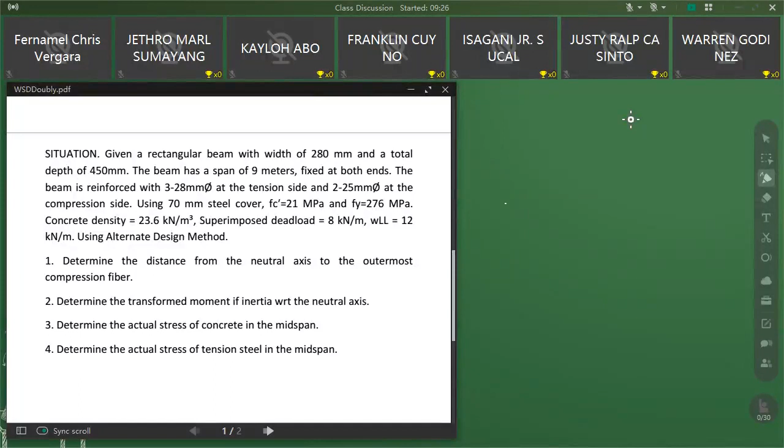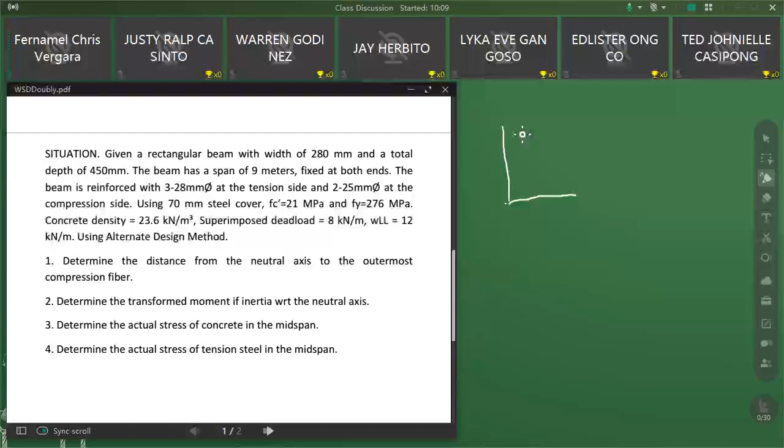So let's continue our discussion from last meeting, which is the working stress design method, one method of designing reinforced concrete. What we discussed last meeting was singly reinforced beams, meaning the tension rebars are only on the tension side.

If this is our neutral axis, and this is the compression side and this is the tension side, we only place steel bars on the tension side. This is what we call a singly reinforced beam. So why did I say the compression side is on top and the tension side is below the neutral axis?

Because if you have a simply supported beam and we load it, say with a uniform load, which is typical in structural design, let's call it W in kilonewtons per meter. If this is the shape of the load and this is your beam, the effect of the load on the beam, when it bends, will cause the beam to bend downward.

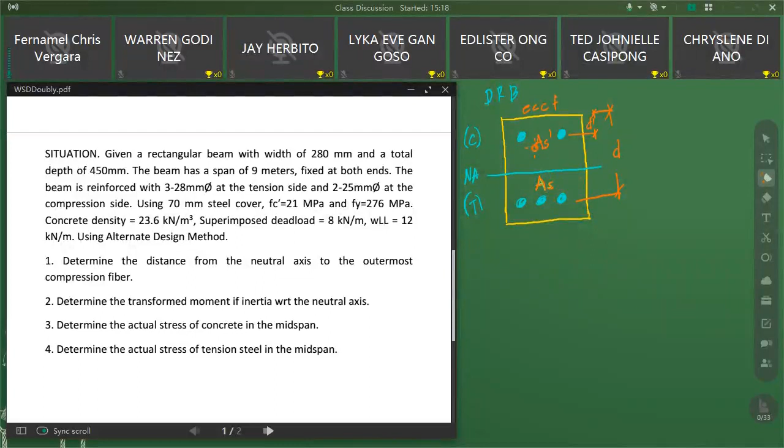The area on the tension side is As, the area on the compression side is As prime - that's the only difference. So when you analyze using WSD, the procedure is still the same. First, you draw the gross section of the beam. Next, you crack the beam at its center.

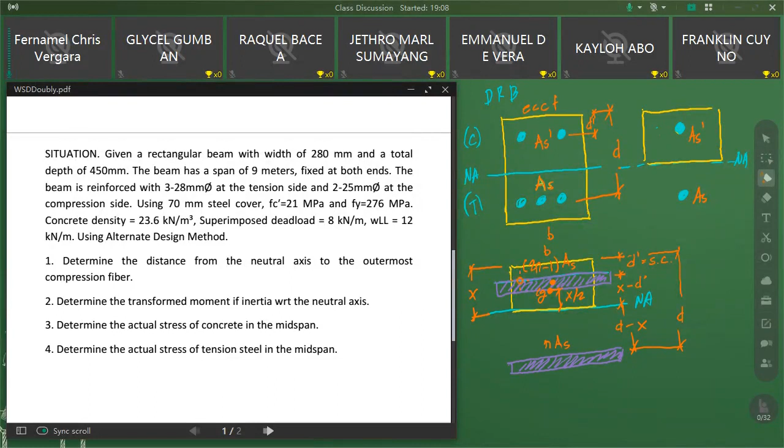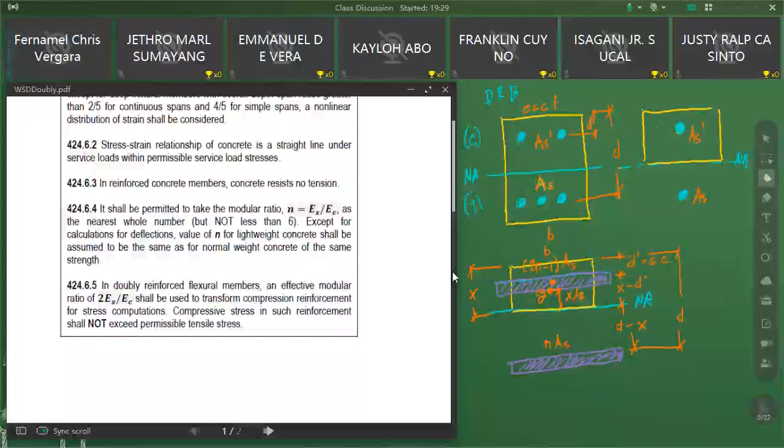It shall be permitted to take the modular ratio N equal to ES over EC as the nearest whole number but not less than 6.

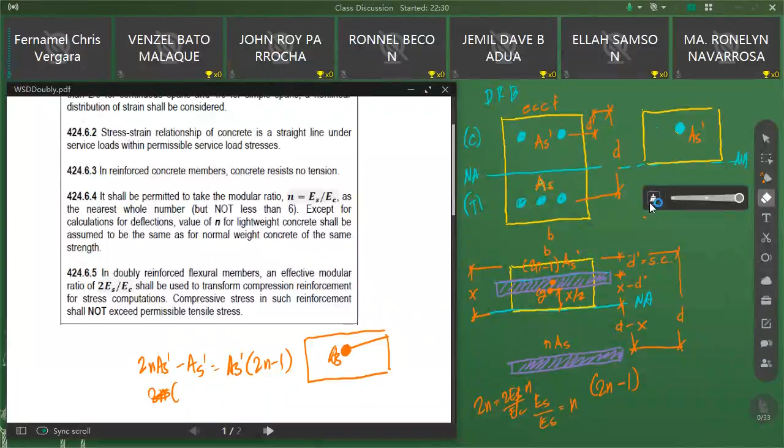So let's proceed to our example. You have here the situation.

Given a rectangular beam with width of 280 mm and total depth of 450 mm, the beam has a span of 9 meters, fixed at both ends, meaning this is a fixed-ended beam with a length of 9 meters. The beam is reinforced with 3-28 mm diameter bars at the tension side and 2-25 mm at the compression side. Using 70 mm as the steel covering, Fc equals 21 MPa and Fy equals 276 MPa.

The concrete density, or unit weight of concrete, is given as 23.6. This is based on the concrete density found in section 204 of the NSCP, Table 204-1, for dead loads in kilonewton per cubic meter.

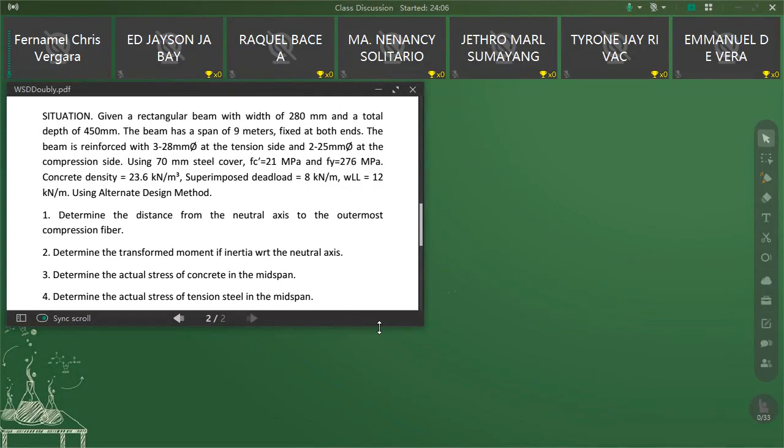The superimposed dead load is equal to 8 kilonewton per meter, and the live load, WLL, equals 12 kilonewton per meter.

Using the alternate design method, determine the following: first, the distance from the neutral axis to the outermost compression fiber, which is x. Second, the transformed moment of inertia, ICR. Third, the actual stress of concrete, Fc, and the actual stress of steel, Fs, at midspan. So those are the questions here.

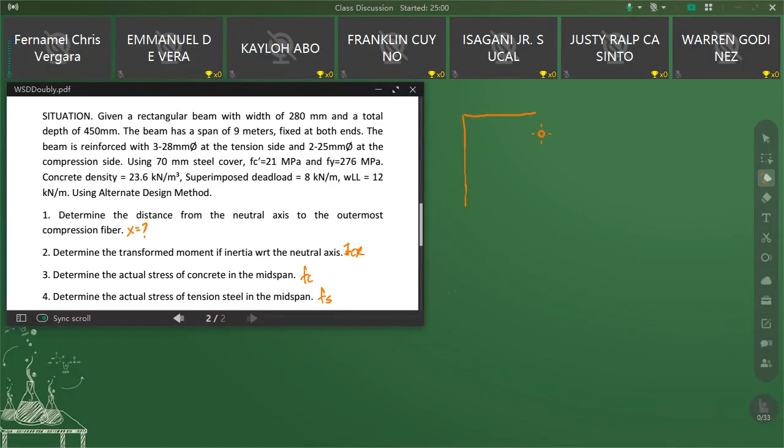So first, let's draw the section, since that's what we should do first. We have a dimension of the beam equal to 280 by 450. The total depth is 450.

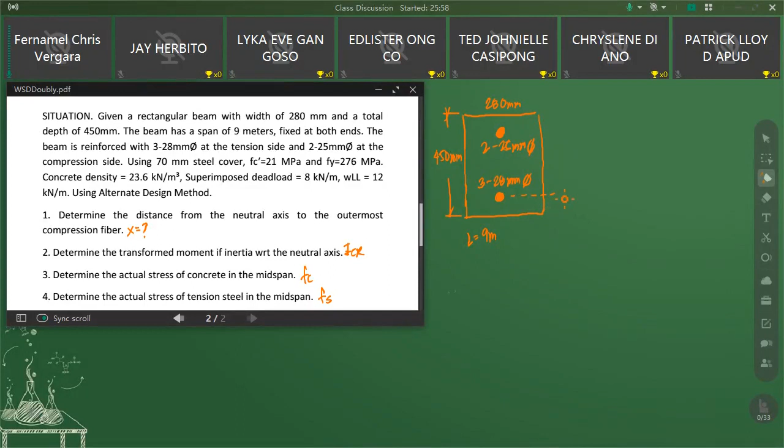The steel covering is the distance from the centroid of the rebar to the adjacent fiber. This is 70 mm, the same for both the tension side and the compression side — the distance from the centroid of the rebar to the adjacent fiber.

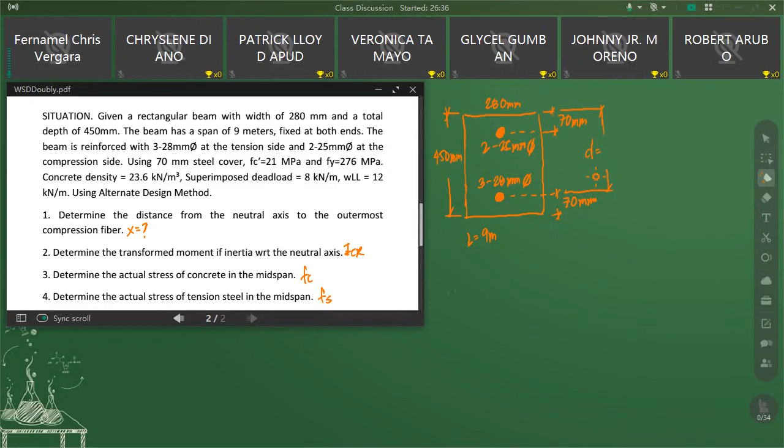So the effective depth, d, can also be solved — it is the distance from the tension rebars to the outermost or extreme compression fiber. If you look at this, d is equal to 450 minus 70 mm, giving you a value of 380 mm.

This is the effective depth. Okay, so we now have all the parameters we need to solve numbers 1 and 2. Let's focus on number 1 and number 2 first. Next, you sketch the section.

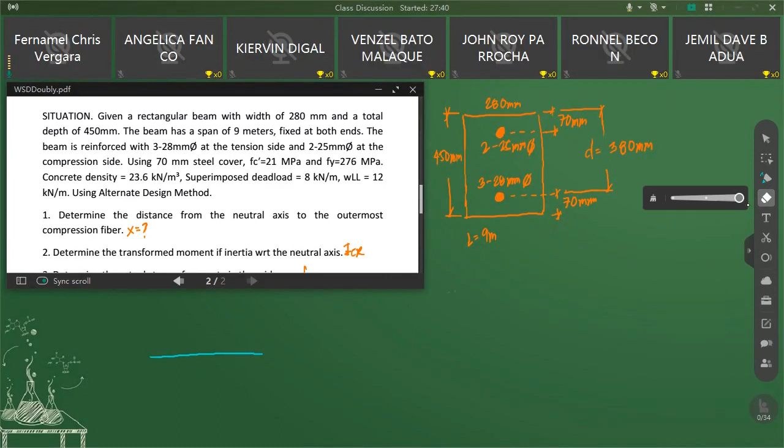You assume a horizontal line near the center of the beam, which will represent the neutral axis. Let's sketch this out. Okay, so here we have the neutral axis.

This is the concrete above the neutral axis, which will be the concrete that resists the compressive stress. This part is 280 mm, this is the base, and the height of our beam section now will be x.

Now for the steel, this is As prime — let's place As prime first. And down here we have As. The distance from the centroid of As to the neutral axis is d minus x.

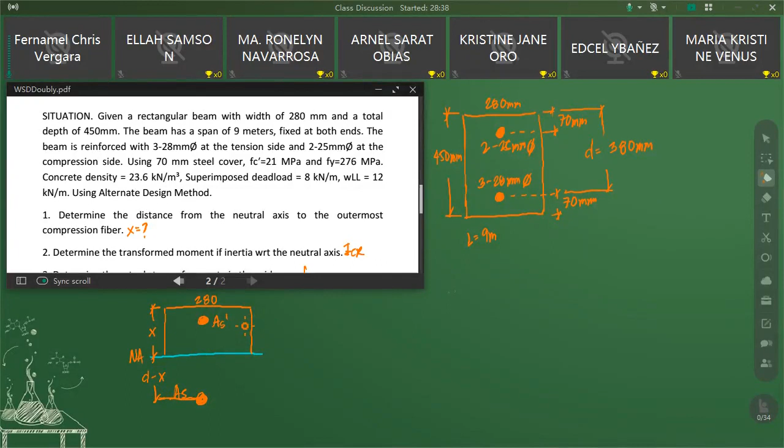We also get the distance of As prime to the neutral axis. If this is 70 mm — which, as I mentioned earlier, is d prime, or the steel covering on the compression side — then the distance of As prime to the neutral axis is x minus d prime, or x minus 70. So that's its distance.

After that, you convert or transform the section into a homogeneous section. This means our steel needs to be transformed, or transposed, into concrete — all the steel we have.

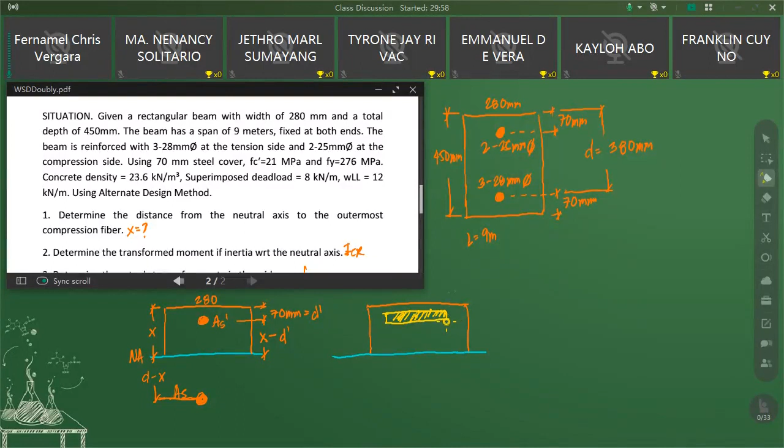So, let's place the distances. You have the effective depth, 380 minus x, and this is x. And here, going to this point, is x minus 70, or x minus d prime. The centroid of the rectangle, going to the neutral axis, is x over 2.

So once you convert the steel, you add a multiplier. You have n times As here, and here, 2n minus 1 times As prime.

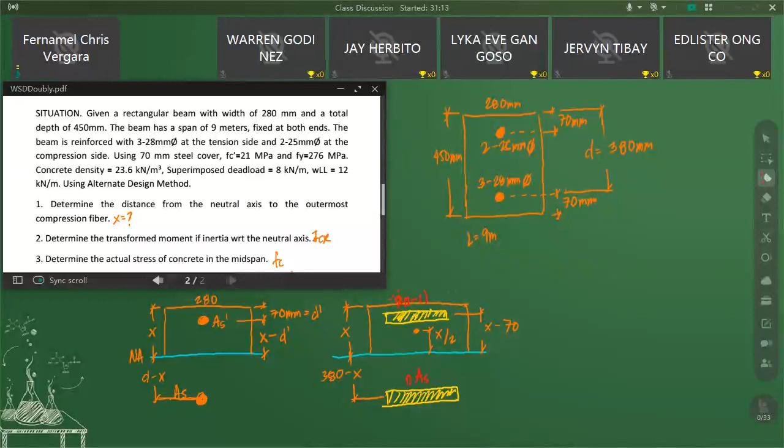AS prime. So alam naman natin na 280 mm, no? 280 mm yung base nito.

So since na-transform na natin yung section, susunod nating gagawin dito is i-equate natin yung first moment of area above the neutral axis sa first moment of area below the neutral axis.

So yung formula natin nito, alam nyo naman, this is equal to area times y bar. Napakadali lang yan, dapat alam lang natin yung formula for area at yung y bar. So above the neutral axis, no?

The area above the neutral axis, dalawa yung magiging area natin: yung rectangular block or yung rectangular concrete na may base na 280 times x. So you have the base times the height of the concrete times the y bar of the concrete block, that is x over 2, plus...

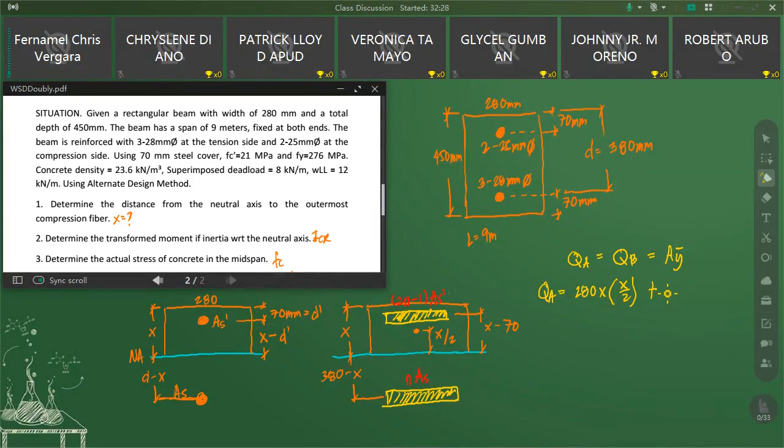Ano pang nasa taas ng neutral axis natin? Yung ating steel, no? Yung compressive steel. Yung area niyan is equal to 2n minus 1 times AS prime, and yung distance niya papunta sa neutral axis is x minus 70. Ayan, so this is your Q above.

The first moment of area above. Substitute na lang natin yung mga values, or kunin muna natin yung N at saka yung AS prime, no?

Mas magandang kunin muna natin yan. Yung N natin dito, you have the formula ES over EC. So you have the elasticity of steel equal to 200,000 over the elasticity of concrete, which is equal to 4,700 square root of FC prime.

Your FC prime is 21. So your N here, diretsuhin ko na lang to, I think this will be equal to 9 point something. But sabi sa code natin, the value of the modular ratio will be round off to the nearest whole number. So magiging 9 lang, okay?

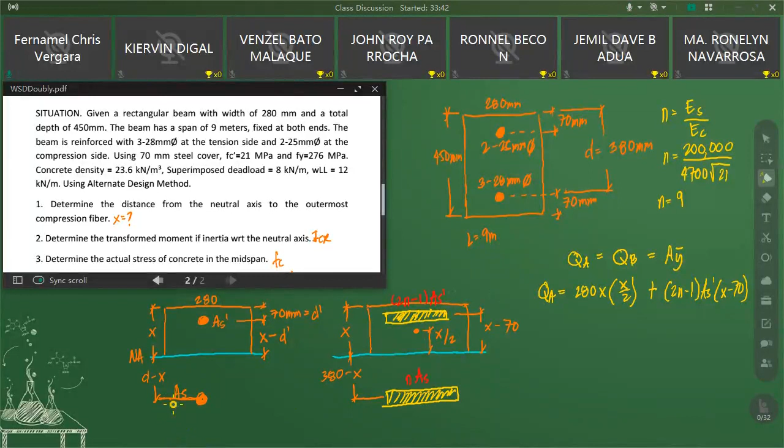So yung AS prime naman natin dito, try lang muna natin i-solve. Palitin ko lang muna to. Yung AS prime natin is equal to N times number of bars, no? Dalawang 25 mm yan, diameter. So you have 2 bars, 25 mm diameter, times area of 1 bar.

You have pi over 4 times 25 squared. So you can cancel this, you have AS in terms of pi lang natin. So this is 2 and 4, no? Magiging 1/2, pi over 2 times 25 squared. So you have 312.5 pi. Magiging sagot dito.

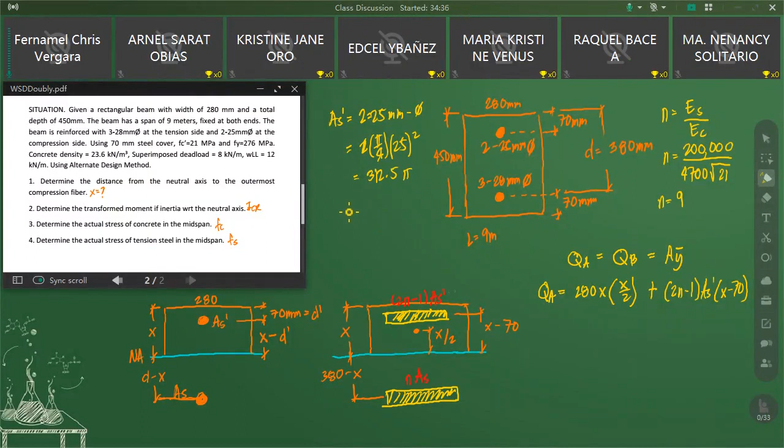Now for AS naman, you have 3 bars, 28 mm diameter. So this is equal to 3 times pi over 4 times 28 squared. Ayan, so dito try natin i-solve in terms of pi pa rin para maging exact lang yung ating sagot, no? So you have 588 pi. Okay, so in terms of pi lang natin para maging exact talaga yung values natin dito.

Okay, so this is for AS and AS prime. So dito, substitute na natin sa Q above.

So we have 280 x squared over 2 plus 2 times n, which is 9, minus 1, times AS prime, you have 312.5 pi times x minus 70. So this is your Q above.

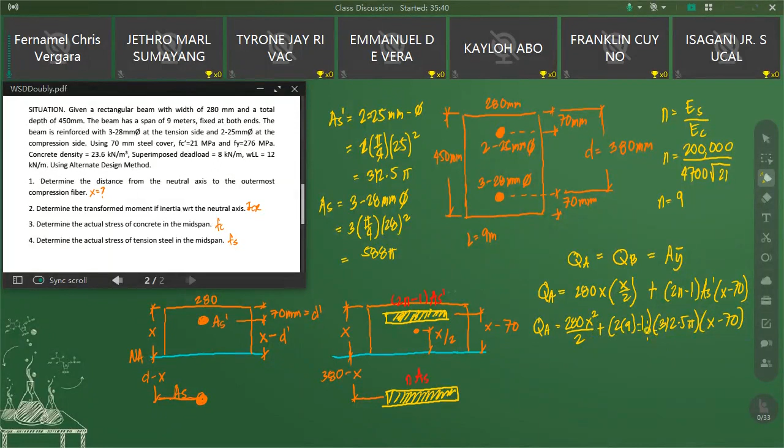Your Q below naman is equal to area below the neutral axis times the y bar below the neutral axis. So the area below the neutral axis, that is NAS. Yung steel, yung tension steel na na-convert kay concrete, may area siyang NAS. And yung distance niya from its centroid to the neutral axis, it is equal to 380 minus x, or d minus x. So ito yung ating Q below.

So substituting the values for Q below, you have N equal to 9, AS equal to 588 pi, times 380 minus x. So ito na yung ating magiging... ay, Q below, no? Q below.

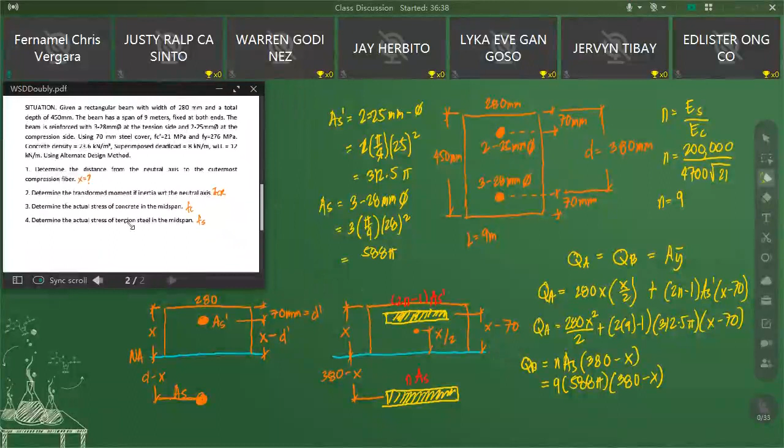So pwede na siguro natin i-equate ito, itong Q above and Q below, para makuha na natin yung ating value for x.

So Q above is equal to 280 x squared over 2 plus you have 18, that is 2 times 9, minus 1, times 312.5 pi times x minus 70. This is your Q above, equating it to the Q below, the first moment of area below the neutral axis. You have 9 times 588 pi times 380 minus x.

So you get the value of x. You should solve for the value of x. What did you get? So may isang nakakuha na ng sagot agad.

141.071. Paano naman yung iba, wala bang ibang sagot? Wala, so i-adapt ko na lang yung sagot ni Casinto, na 141.071, which is yan yung tamang sagot.

141.071, this is in mm. Naka-mm yan. Lagyan niyo ng unit yung mga values niyo para malaman natin kung tama o hindi yan, kailangan may unit kayo sa final answer niyo. So this is the answer for number 1.

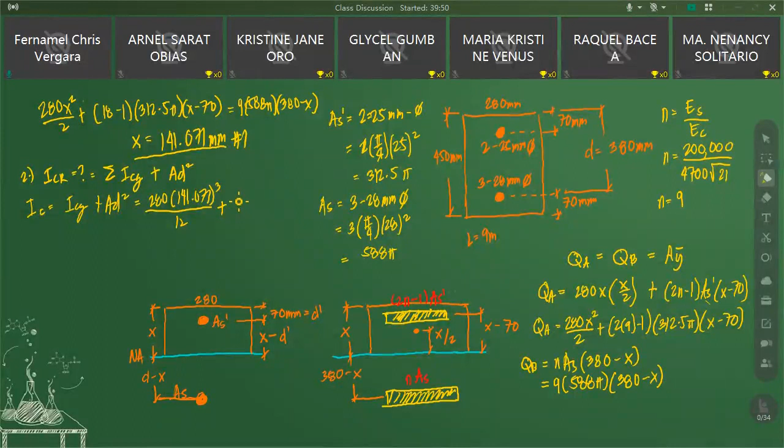The area is equal to base times height lang, 280 times the height of the concrete which is x, 141.071, times d squared. Yung d, it is the distance from the centroid of the section to the point kung saan mo gustong kunin yung inertia.

Ito yung section natin, itong concrete, and this is its centroid. Nandito yung centroid niya. The distance from its centroid papunta sa neutral axis, kasi doon natin gusto kunin yung inertia, is equal to x over 2. So therefore this will be 141.071 over 2, naka-squared yan. Okay, ilan yung magiging IC natin?

Or, the inertia of concrete with respect to the neutral axis. This is only for the concrete, para lang yan sa concrete.

So you have 280 times 141.071 cube over 12, plus 280 times 141.071, times 141.071 over 2, square niyo, naka-square dapat yung D. So you have 262,029,393.3 na natin. Yes, thank you Herbito and Casipong.

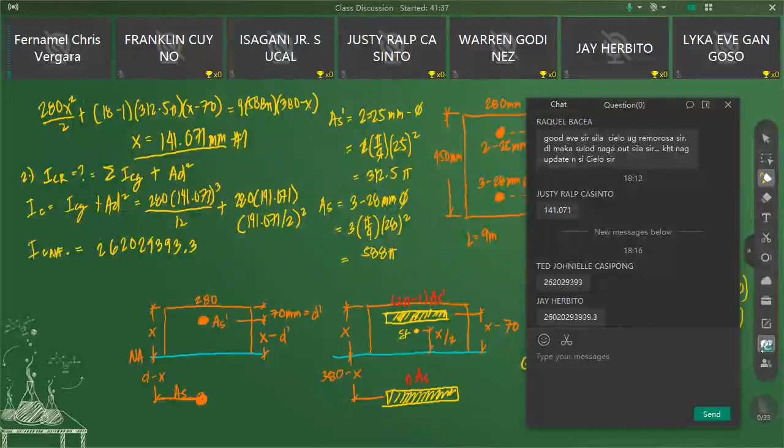Pareho naman kayo ng sagot, 262,029,393.3. This is in mm raised to 4.

So this is the inertia of the concrete with respect to the neutral axis. This is not yet the answer, kasi kailangan nating makuha yung inertia ng steel na nandito, present sa ating section. Para pa lang yan sa concrete.

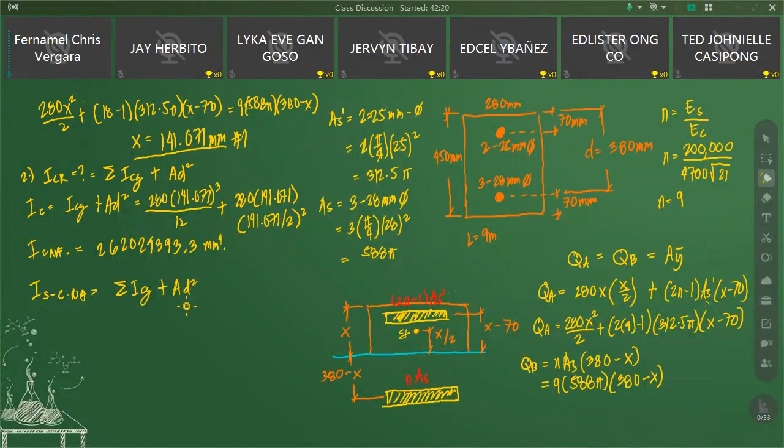Yung steel naman na na-convert kay concrete, kukunin natin yung inertia niya with respect to the neutral axis. Meron tayong dalawang steel dito. Sabi ko nga, kapag steel na na-convert kay concrete, at with respect to this design method na WSD, our ICG or the centroidal inertia will be equal to 0.

Therefore, ang magiging formula na lang dito is summation of AD squared, above and below. Below the neutral axis muna tayo, we have the area NAS times D squared. The distance from the centroid of this area papunta sa neutral axis is D minus X, or 380 minus X.

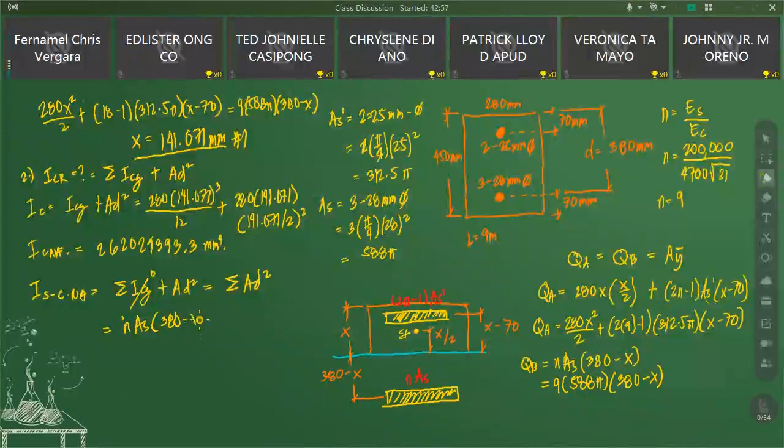Naka-square yan. This is the neutral axis. Plus yung AD squared above the neutral axis, yung area diyan sa taas ng neutral axis is equal to 2N minus 1 times AS prime.

This is the area ng steel na converted into concrete above the neutral axis. Then you multiply it by the distance from its centroid to the neutral axis, you have x minus 70, naka-square dapat yan. So, ilagay na lang natin yung mga values.

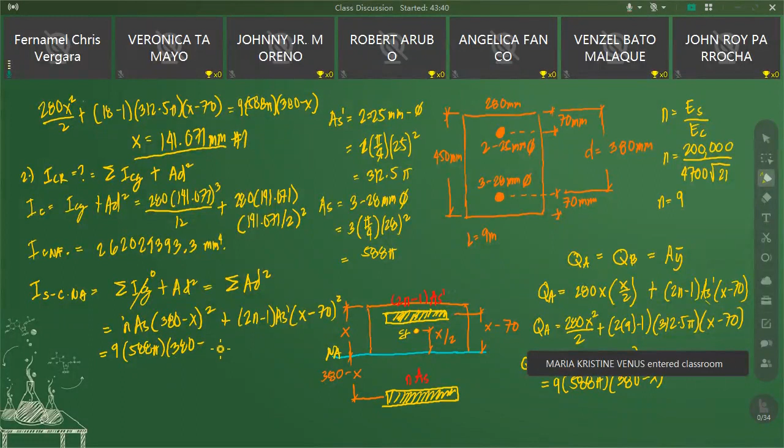You have n equal to 9. You have AS equal to 588 pi times 380 minus x, which is equal to 141.071, squared, plus 2NAS, you have 2 times 9 equals 18, minus 1, then AS prime, ito, AS prime natin is 312.5 pi. Then you have the distance d squared, x minus 70, the x is equal to

141.071 minus 70 squared. So ilan yung ating magiging value for the inertia of the steel that is converted to concrete about the neutral axis. Ito pa lang yung inertia ng steel na na-convert kay concrete. Ilan yung magiging value natin dito? Medyo mahaba yung ating i-type.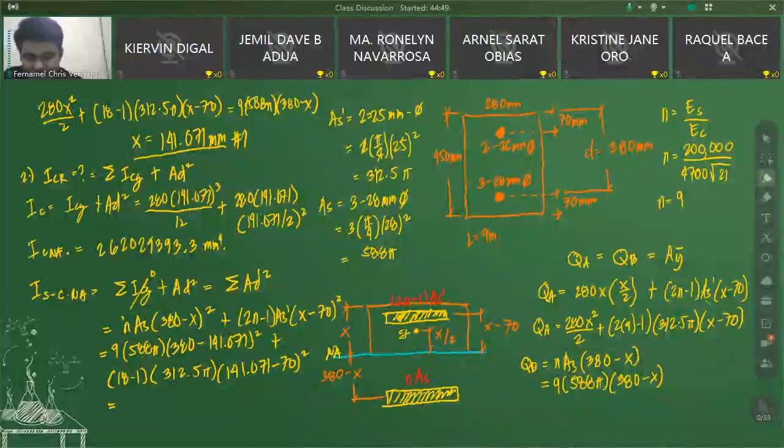So you have 9 times 588 pi times 380 minus 141.071 squared, plus the NAS, 2NAS, 18 minus 1, times AS prime, AS prime is 312.5, then multiply by the distance d squared, 141.071 minus 70 squared. Ilan yung nakukuha? Oops, iba yata yung nakukuha.

Iba-iba yung nakukuha ninyo, no? Sige, hintayin natin sa iba. Ayan, pare-parehas na yata yung 274. Yung ating 274 yung ating last 3 digit. Ayan na siguro, tama na siguro yan. So, you have 10, 3, 3, 3, 9, 1, 2, 7, 4.

Walang decimal value. This is in mm raised to 4. So, the cracked section moment of inertia of this section is equal to the inertia of the concrete plus the inertia of the steel that is converted into concrete.

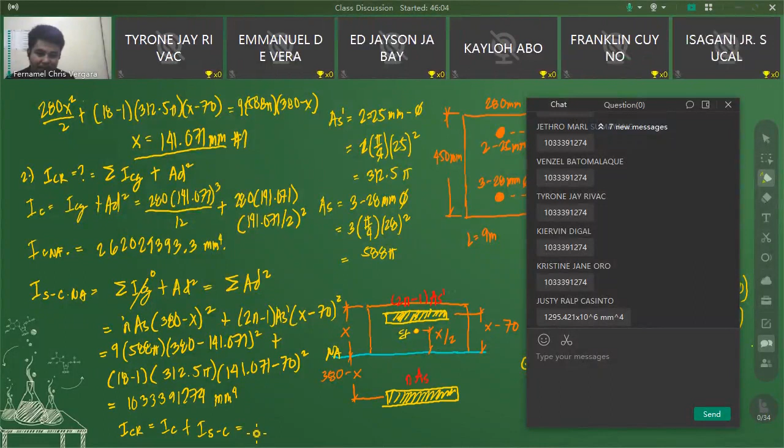So you have, bilis naman makasagot, no? That is 1295. Yes, that's the correct answer.

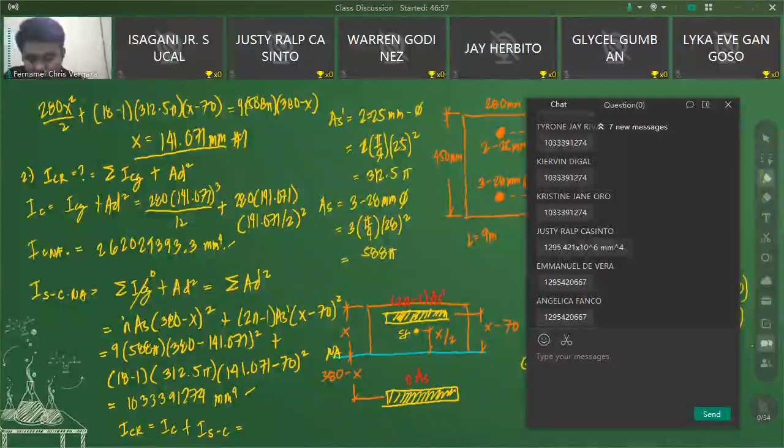Yung mga ICR at saka yung Q above, Q below, kasi doon naman talaga nauuna, no? 1295

420667. So this is in mm raised to 4. Don't forget the unit, no? Kasi hindi natin ma-appreciate yung value kapag wala yung unit. Di kasi natin alam kung ano yung value na yan kung wala yung unit. Kasi kapag may mga values kang nakikita na ang unit is naka-mm, naka 4 degree yan, pwede mo nang sabihin na inertia yan, no?

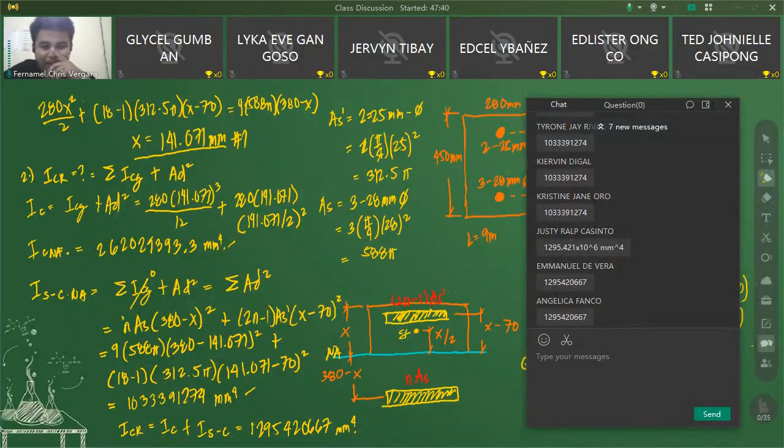Merong mga problem, no? Meron akong mga problem na medyo nakakatawang mga problem sa board exam. May experience yan, depende na lang sa examiner ninyo. Pero pwede nyo kasing ma-experience yan. Meron tayong mga question dun sa board exam. Merong problem, katulad na lang yung situation na nilagay ko dito. Ganyan kasi ang mga problem sa design.

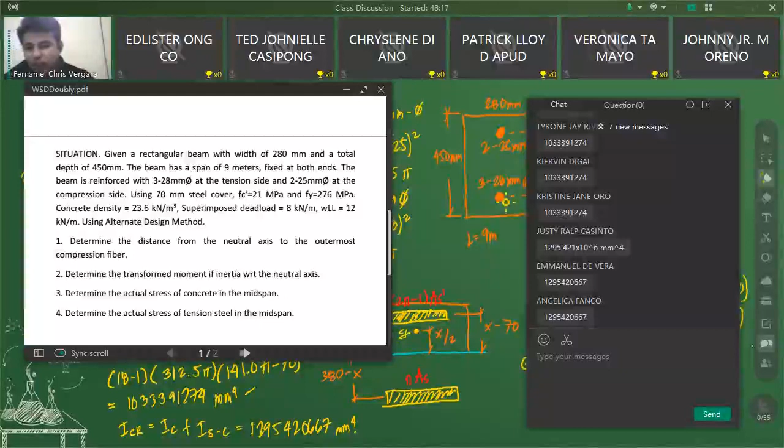Naka-situational yan. Ano to? Isang situation, no? May isang situation, then apat yung tinatanong or tatlo. So yung ibang mga dito, yung mga ibang board sa ibang board exam, may mga problem na mag-a-appear sa board exam ninyo na meron kang situation, walang problem pero merong choices, merong choices at saka merong unit.

So kung ganun yung na-encounter ninyo, ang pagbabasihan nyo na lang doon is yung unit. Kunwari, ganito yung problem na binigay. Nakita nyo sa number 1 ang unit. Uy, WSD, no? Alternate design method and WSD is the same, parehas lang yan sila. So pag nakita nyo walang tanong pero may choices na naka-MM, ano nang iisipin nyo? Isipin nyo, ano nang magiging, kumbaga, hint, no? Siguro yung tanong dito is yung distance from neutral axis to the outermost compression fiber. Ganon, pwedeng ganon, no? Next na tanong.

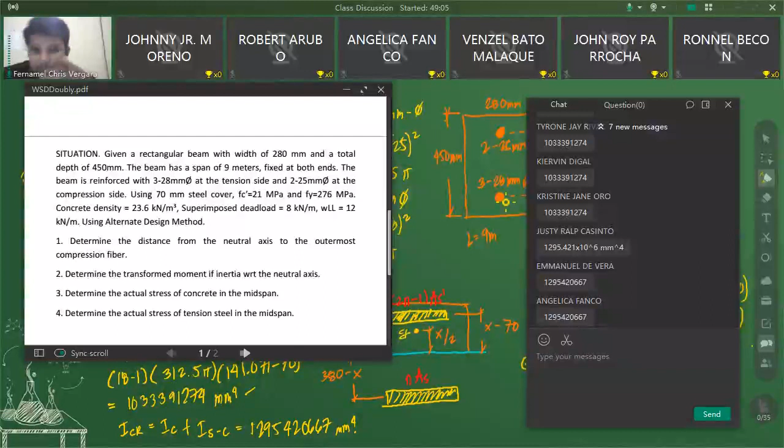Next na item. Wala pa ring tanong, pero merong choices, may choices na naka-mm raised to 4. So malamang na malamang inertia yon, di ba? So ganun, ganun ka-tricky yung mga errors sa board exam. So dapat alam niyo din yan.

Masanay kayo na kapag nakakita kayo ng MPa na unit, stress yan. Kapag naka-linear yan, pwedeng distance, ano yan, depende. May linear tayong length, no? May linear din tayong force. Linear din yan sila. So kapag Newton mm, so moment yan, or kilonewton meter, moment na agad yan. So nakadepende na lang yan. Okay? So sanayin nyo lang na nilalagyan nyo yun ng unit, kasi sa unit pa lang, malalaman mo na agad kung ano yung hinahanap.

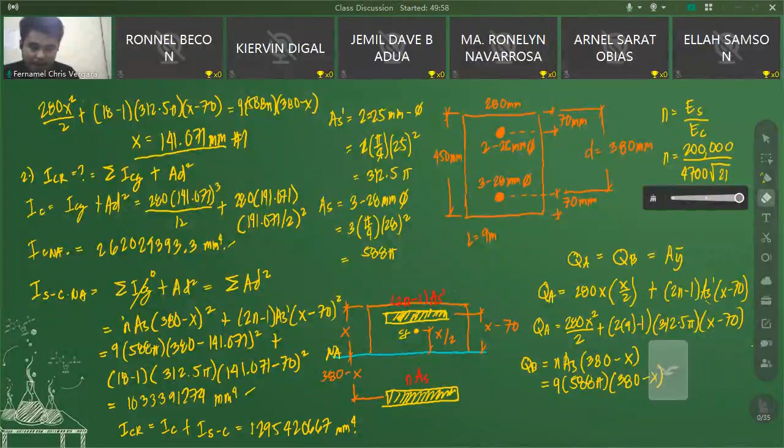So bukahin ko lang to dito, kasi wala akong mouse ngayon. So for number 3, tingnan nyo ang number 3 question. Number 3 question is, ano ba yun? Hinahanap dito yung actual stress of concrete in the midspan.

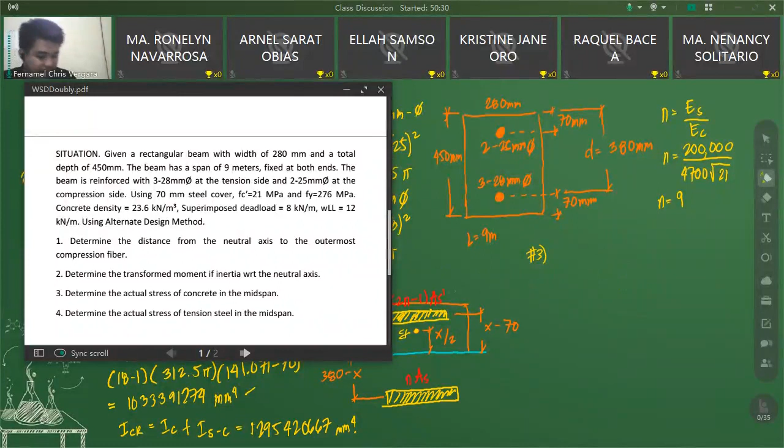Sa midspan ha, ano ba yung beam natin? Kapag hinahanap yung actual stress sa midspan, actual stress of concrete, meaning FC yan. And yung FC natin is equal to MX over ICR. Ayan yung ating formula for FC.

For Fs naman, the actual stress of the tension steel in the midspan, you have N times M times D minus X over ICR. Yan naman yung ating formula. So ang kailangan mo pala para ma-solve yung mga actual stresses na yan, actual flexural stresses, is yung moment, yung X at saka yung ICR.

Kung makikita nyo dito, doon naman sa Fs, kailangan natin yung N, yung D, yung X, yung ICR at saka M. So meron na tayong X, meron na tayong N, meron tayong D, meron tayong ICR. Ang kulang na lang dito is yung moment. So titignan natin kung paano natin makukuha yung moment. Nagbigay dito ng fixed-ended beam, na merong length na 9 meters.

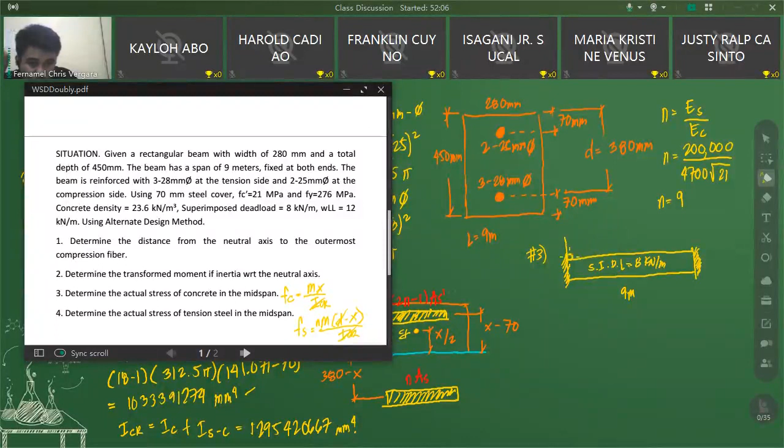May load daw, binigyan ng load. May nakalagay daw na load na superimpose yung tawag. Superimpose dead load, which is equal to 8 kilonewton per meter. At meron din tayong superimposed dead load and WLL, which is the live load. So this is equal to 12 kilonewton per meter.

Last time, na-discuss ko na kung anong pagkakaiba ng superimpose at saka impose, kung natatandaan nyo. Yung superimpose, kapag sinabi mong superimpose, hindi pa kasama yung weight ng structural member. Meaning dito, sa superimposed dead load na 8 kilonewton per meter, since superimpose siya, hindi pa dito kasama yung weight ng structural member, which is yung beam natin.

Di pa kasama yung weight ng beam. Kapag kukuha ka ng load na kine-carry ng beam, dapat isama mo yung self-weight or yung weight niya. So ang kailangan natin dito is kunin yung weight ng beam, i-add na lang natin dito sa mga load natin.

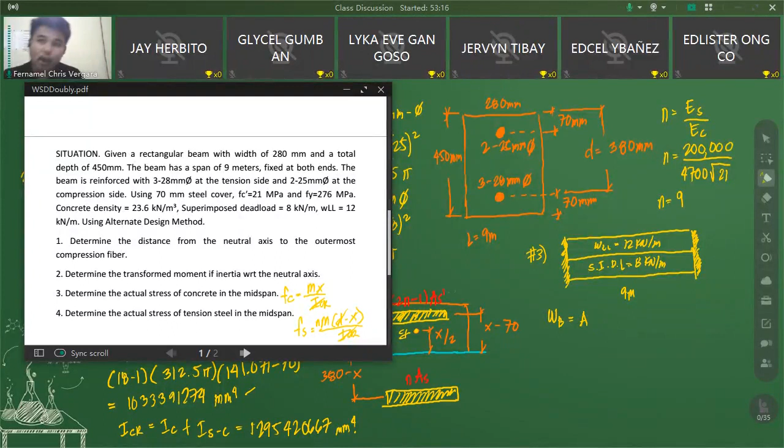Sa pagkuha ng weight ng beam, yung magiging formula is volume times the unit weight, ganun yung ginagawa natin. Pero dito, gusto natin makakuha ng weight in terms of kilonewton per meter. So ang gagamitin lang natin is area times the unit weight, of course concrete beam yung meron tayo, so unit weight of concrete.

So the area of the beam is 0.28, or 280 mm, gawin lang nating meter yan, times 450 mm, yung total height niya. So base times height lang yung area niya, so 0.45 meter na yan.

Naka-meter na, i-meter ko lang siya kasi kailangan kong maka-arrive sa unit na kilonewton meter. So 0.45 meter times the unit weight of concrete na 23.6 kilonewton per cubic meter.

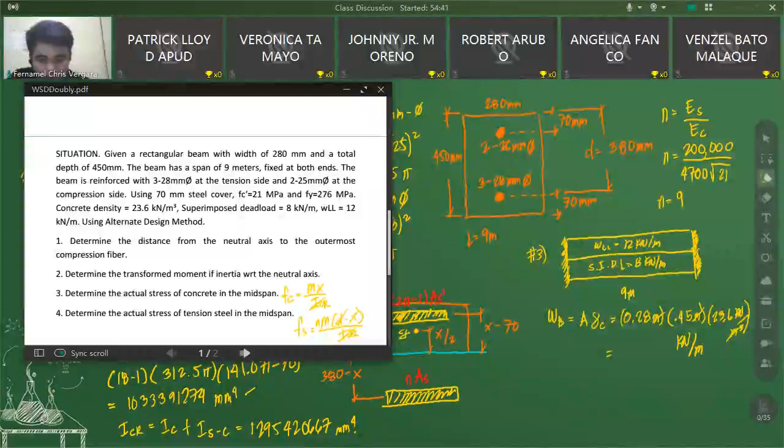Cancel na to. Ang maiiwan na unit dito, kung makikita nyo, is kilonewton meter. So the weight of the beam in terms of kilonewton meter is equal to 2.9736. Gamitin na lang natin yung lahat ng decimal value nito.

So the total dead load, kasi dead load yung weight ng beam. Sinabi mong dead load, fixed load yan siya, and the weight of the beam is fixed. So yung total dead load or tinatawag nating imposed dead load. Kapag sinabi mong impose, inalis mo yung super, meaning imposed dead load na kasama na yung weight ng beam. The imposed dead load is equal to 8 plus 2.973.

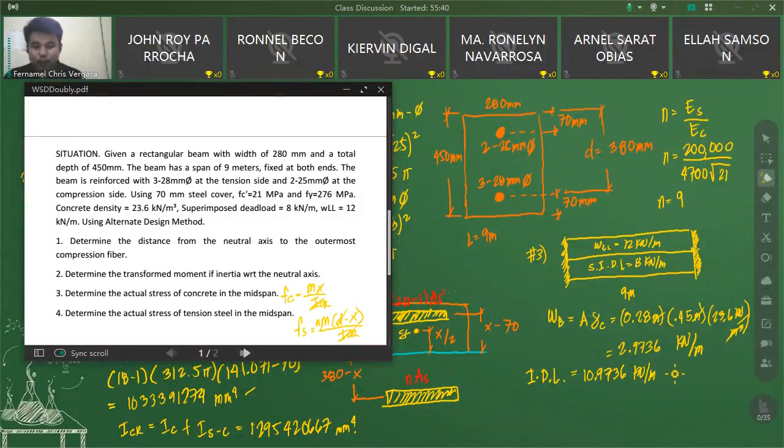Add mo lang tong 8 dito sa 2.9736, so we have 10.9736 kilonewton meter. Ito na yung imposed dead load, which is the total dead load. Yung total dead load at saka yung imposed dead load, parehas lang yan.

Yung superimposed dead load naman, partial dead load lang yan siya. Yun lang yung dead load na kine-carry ng isang structural member, hindi pa kasama yung weight ng isang structural member. So okay, meron na tayong imposed dead load.

Siguro ang gagawin ko na lang dito is ilalagay ko na lang siya dito sa taas. So meron tayong additional dead load dito, na 2.9736 kilonewton per meter. Ayan na lahat ng load natin na kine-carry ni beam.

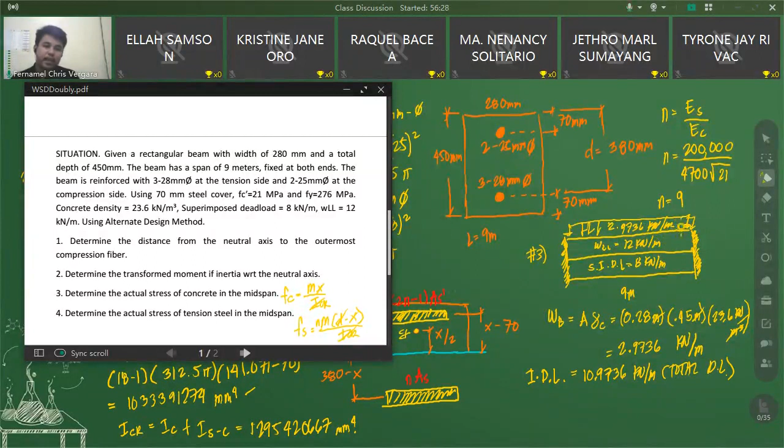Tandaan nyo dito sa problem, ang hinahanap is yung stresses. At yung stress na hinahanap dito, naka-specific naman yung tanong dito na yung actual stress of concrete in the midspan, meaning sa gitna, dito sa gitna ng beam, sa midspan.

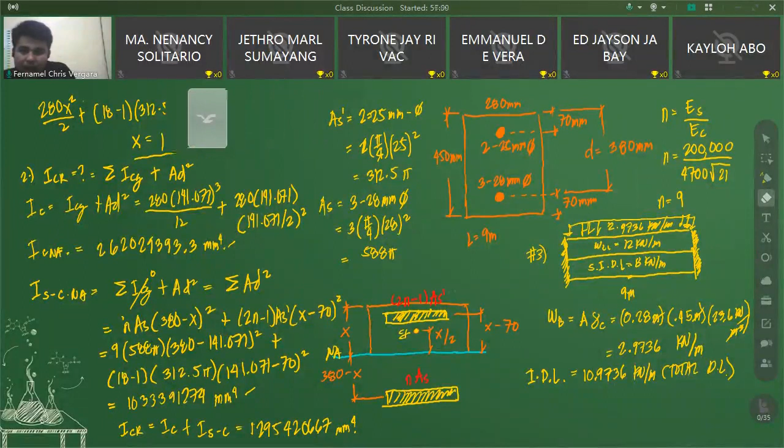Pag meron kang fixed-ended beam, ang moment mo sa midspan, since yun yung hinahanap na stress, yung stress ng concrete, or the flexural stress of concrete, actual stress of concrete at the midspan, meaning ang kailangan mong gawin dyan is kukunin mo din yung moment sa midspan.

Yun yung kailangan mong kunin na moment o i-consider na moment. Dito sa fixed-ended beam, yung maximum moment natin dito sa fixed ends, sa ends niya, is negative WL squared over 12. Dito din, negative WL squared over 12. Dito naman sa midspan niya, yung moment natin dito is equal to positive WL squared over 24.

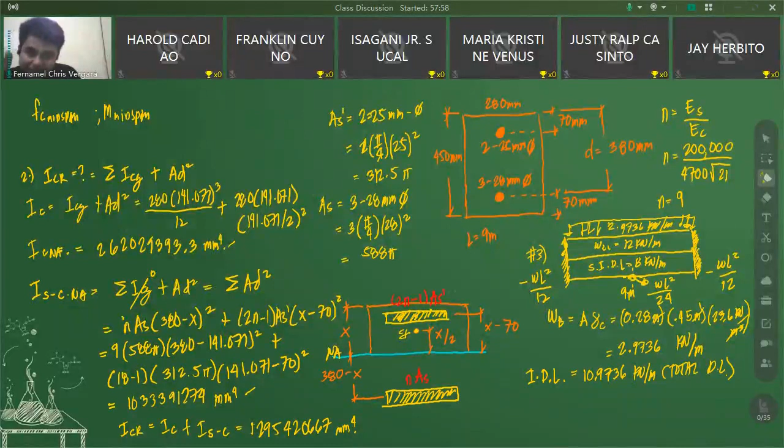Over 24. The moment at midspan of a fixed-end beam with uniform load, considering that the load imposed on your beam is uniform throughout its span. So that is for the fixed-end beam with uniform load throughout its span.

The moment at the midspan is equal to WL squared over 24. If you try to solve the moment using the method taught in your theory of structures and strength of materials, you can use that to check if your answer is correct. So the W here will be the total load, and L is the length of our beam, which is 9.

The total load here is equal to the sum of the dead loads and live loads. We don't need to apply a load factor for WSD. It's only in LRFD or USD where we apply load factor or load combination, using 1.2 dead load and 1.6 live load. So you have the W here, which is the summation of the dead loads and live loads.

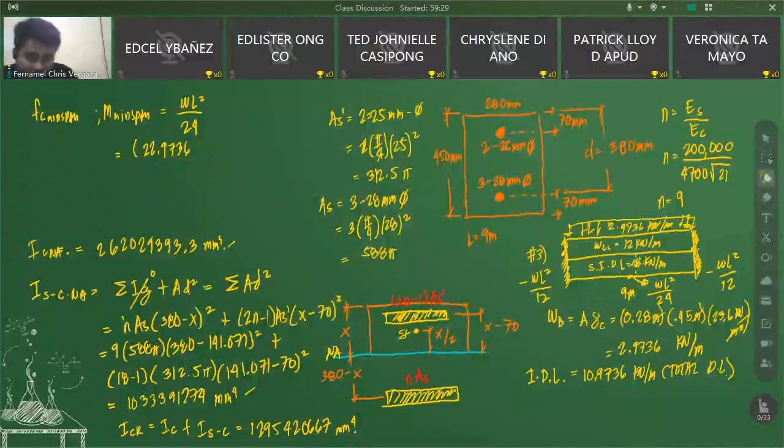When you sum these together, you get 22.9736. So you have 12 plus 8 equal to 20 plus 2, giving 22.973. Copy the decimal value. Then you have L, the length here is 9.

It's squared. You divide this by 24 and you get the moment at midspan. So you have 22.9736 times 9 squared over 24. You get 77.5359 kilonewton meter.

This is not per meter, this is kilonewton meter, so this is the unit for the moment. The value for the moment is 77.5359. So next, the same value applies, same as Digal and Herbito. Thank you for checking my answers.

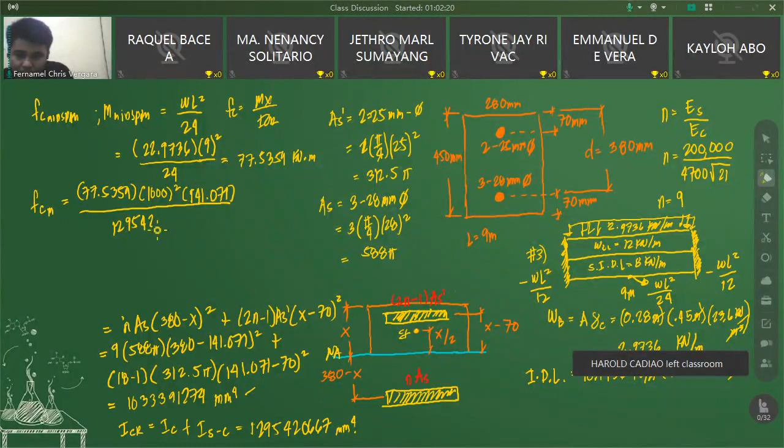Over the ICR, the cracked section moment of inertia, you have 12,95420,667. Is that correct for my ICR? Yes, 12,95420,667. So your actual flexural stress of concrete at the midspan is equal to how much?

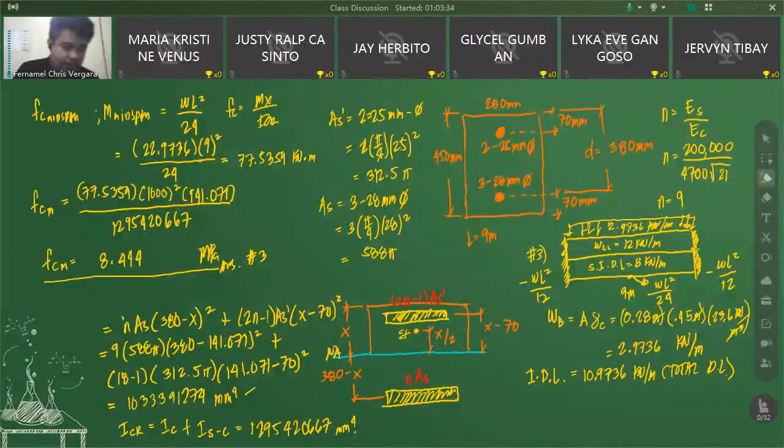Next, this is very easy. If you just know how to get the moments and of course reactions, and how to analyze the loading on beams, it's very easy to get the flexural stress. Actually this is your topic in strength of materials, the flexural stress, shear stress, axial stresses. We have different stresses in strength of materials, the tangential, the longitudinal stress. You've probably mastered this already. Let's continue.

Next one is to solve for the flexural stress, actual flexural stress of steel at midspan. You have the formula for flexural stress of steel: N, which is the modular ratio, times the moment, times D minus X, over the ICR.

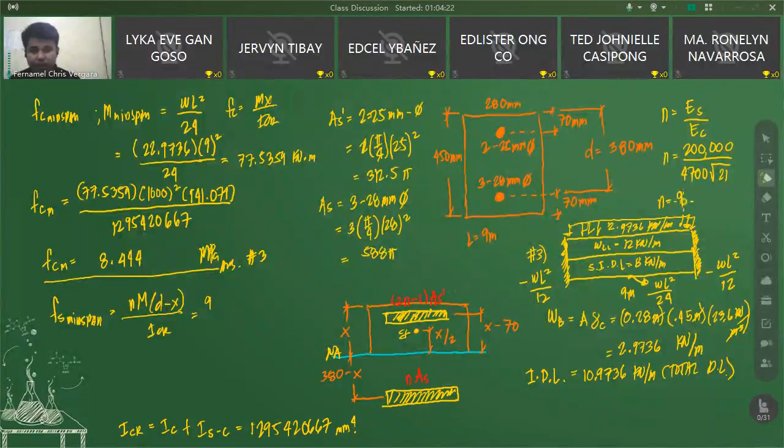So you have N, the modular ratio, is 9. This is 9 point something. You probably know our consideration for N based on our code, that when getting the value of n, you round it off to the nearest whole number. That's why I just put 9 here. You might wonder about that, but you should already know that. So the moment is 77.5359.

Then you multiply this by... actually, when I'm solving, I just put 10 raised to 6 here, because 1,000 squared is just equal to 10 raised to 6. That's less to write, and when you type it on your calculator, it's also less to type. So 10 raised to 6 and 1,000 squared, they're equal.

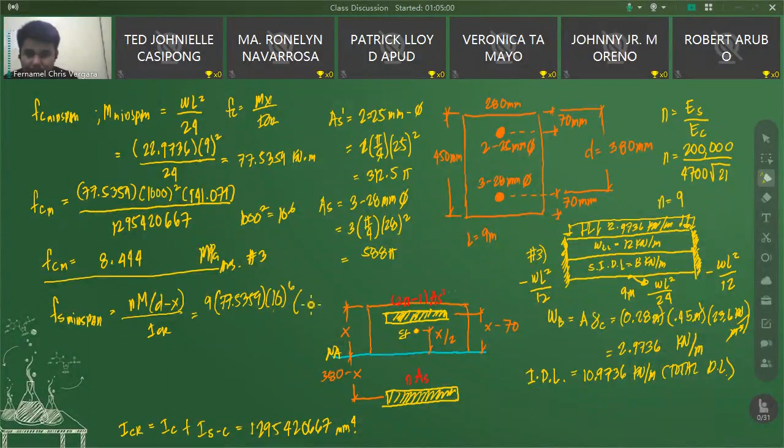Okay, then you multiply this by d minus x, which is equal to 380 minus 141.071 over the ICR. So you have the N, the moment, which is converted into Newton-mm by multiplying by 10 raised to 6, then you have the d minus x.

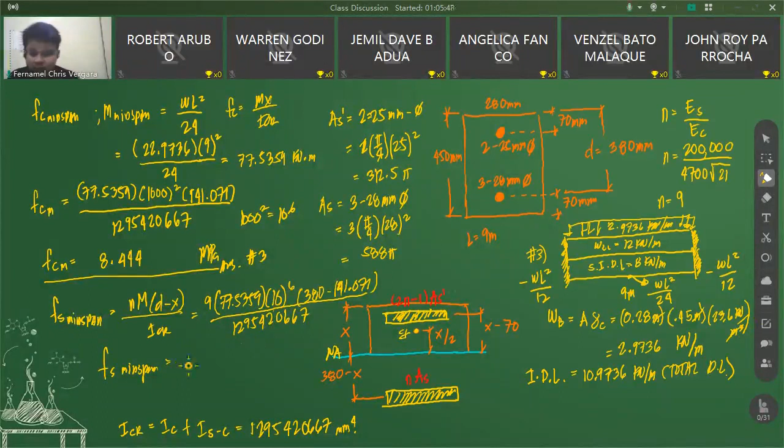This is 9 times, this is 380 minus 141.071 over the ICR. So we have Fs at mid-span, equal to... yes, that is correct, 128.707 MPa. And this is our answer for number 4.

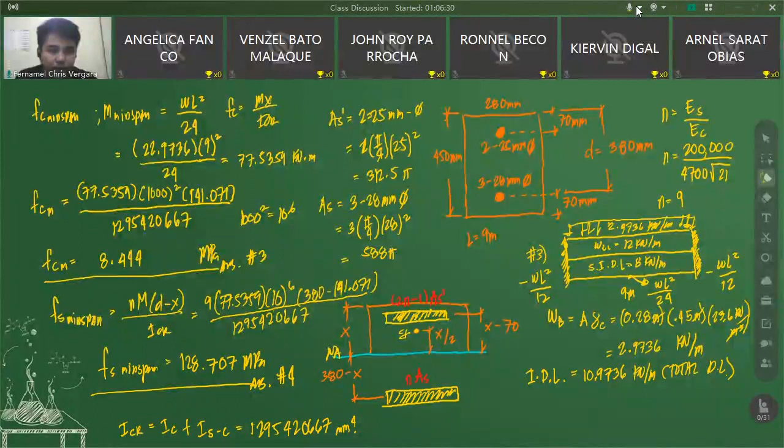So now I will give the floor to everyone who has a question or wants to ask something regarding our topic. Just raise your hand and unmute your mic. Yes, go ahead.

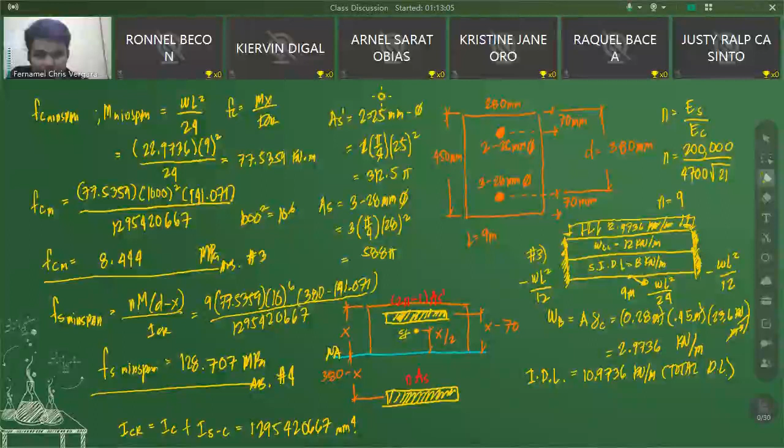Okay? Other question? May mga tanong pa ba? Sige na, itanong nyo na. Para yung pre-stress ko, ang daming tanong, no? Yung hierarchy. At challenge ako sa kanila. Possible naman din yung practical naman din yung mga tanong nila, no? Pwedeng mangyari yun. Sino pang may mga tanong? Hello? Meron pa ba? Wala na? Wala nang tanong?

Yes, of course, nakadepende yan. Kung kayo magde-design, consider nyo yung load na naka-impose doon. At saka, yung mga ganyan na load, alam nyo na dapat yan nung theory and strength nyo pa lang, yung mga load na trapezoidal, yung mga typical na beam na nakikita nyo. Dapat, kung nandito kayo sa reinforced concrete, I assume alam nyo na yung mga ganyan na senaryo ng mga topics. Na bibigyan kayo ng continuous beam or indeterminate beam na mayroong trapezoidal load, and then you do the shear and moment diagram to get the maximum moment para sa inyong flexural stresses. So you practice how to get, how to solve, how to draw, how to create the shear and moment diagram. Paki-practice na lang.

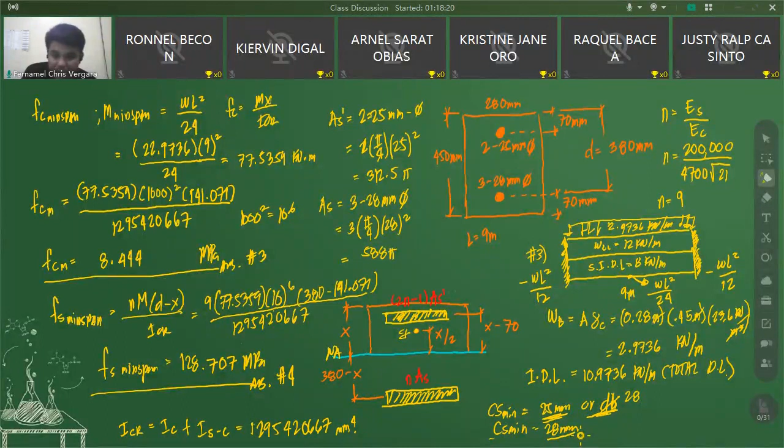Yes, parang ganun. Kung ito yung DB, kung mas malaki siya kay CS minimum - hindi mo naman kino-compare si DB kay CS minimum. Ang CS minimum mo ay kinukuha mo as 25 mm or DB. Depende yung value ni CS o ni clear spacing minimum kay 25 mm o DB. Hindi mo kino-compare itong DB kay CS minimum. Then kung sinong mas malaki dito sa dalawa, yun yung magiging value ni minimum clear spacing. Ganun yun, kapag ganun pa ka kumuha ng CS minimum. Ganun kumuha ng minimum clear spacing.

Other question? Iba pang tanong? Wala na? Okay? Wala na ba?